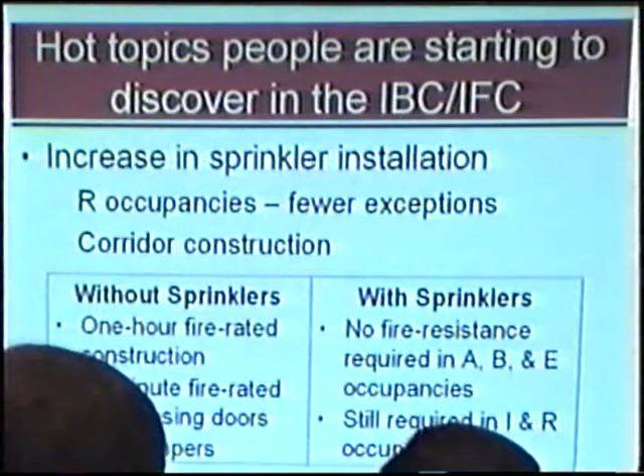So you're going to see many more buildings, say two-story office buildings, those plain mom-and-pop office buildings that would have never gone in with sprinklers before. This is another incentive to get those types of buildings sprinklered under the international codes.

You're going to see a lot of the thresholds reduced. I say proposed because these are proposed amendments. There's still a possible hearing, and things could change. But based on the best estimates right now, here are some of the new thresholds for sprinklering buildings under the I codes.

Occupant load in assembly occupancies greater than 300 people, you sprinkler the building. If that assembly occupancy is above or below grade, or the level of exit discharge, you sprinkler it. That's new. That's something good.

Factory and industrial buildings, we never really had sprinkler requirements for a lot of these. Many were sprinklered because of insurance or size. But now, if you have a factory or industrial building greater than 12,000 square feet, it's sprinklered, as will all institutional occupancies. Mercantile occupancies greater than 12,000 square feet, greater than 3 stories, or greater than 24,000 square feet cumulative on all floors, those are going to be required to be sprinklered.

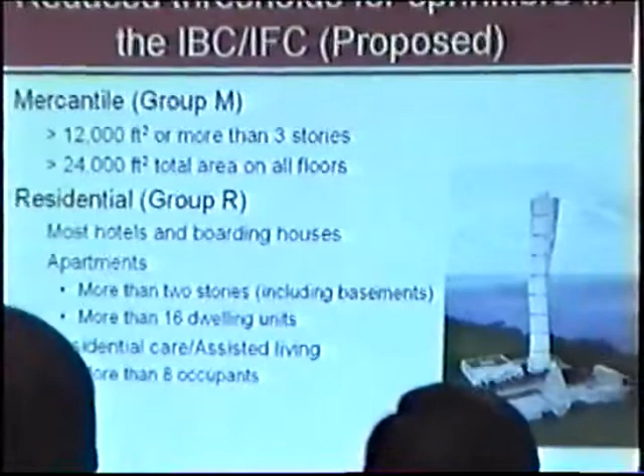Residential occupancies, most hotels, boarding houses, those dormitory-type occupancies, will be sprinklered. Apartments, the thresholds have been lowered and the wording changed. That's a big one: more than 2 stories, including basements.

Before, we had a lot of buildings that were 2 stories with a basement that were apartments. Those were never sprinklered. They will now be. That's a lot of what we build for apartments.

Residential assisted living type occupancies, where we have people with special needs, the threshold's been reduced to 8 occupants. Compare that, I mean, we're pushing these thresholds down more and more.

Compare that to a building I saw just starting construction in Sweden. This is a high-rise, 55-story residential tower, a wonderful building with $1 million apartments in it. In Sweden, you're allowed to build this type of building unsprinklered.

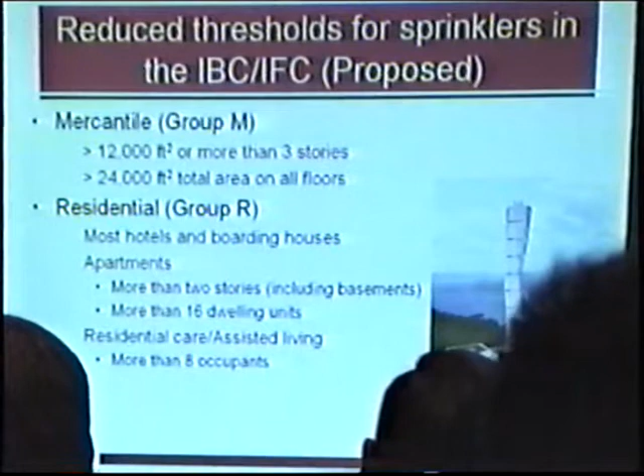And so what the designers did, they said, hey, wait a minute, we should probably still sprinkler this building. So they're going to sprinkler it, but what they did was tell the building official, we'll sprinkler this building, but we want to get rid of one of the 2 exits. So this building, halfway built already, will be sprinklered, but they used that as a trade-off to only have a single exit, single stairway in a 55-story building.

So reducing these thresholds down just improves the safety that much more. 12,000 square feet or more, or 24,000 square feet on all stories for storage occupancies, now you're going to sprinkler those.

Many more fire alarm systems are going to be required under the international codes. But there's a big exception: if you sprinkler the building, a number of those go away. Except in residential occupancies, you have to check the amendments. There's a lot of what-ifs.

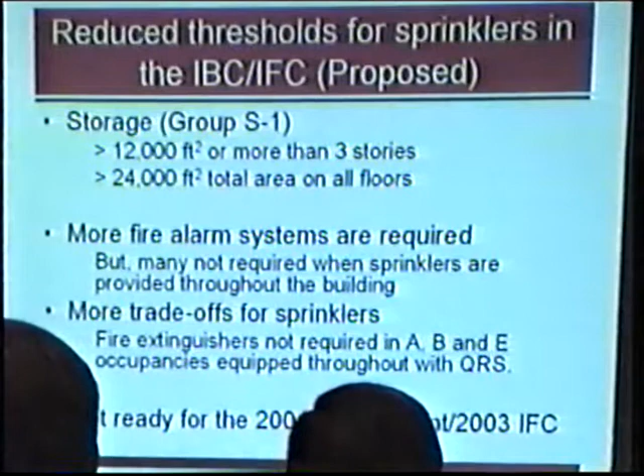But here's another incentive for sprinklering buildings, is that, gosh, I don't want to spend all that money for the alarm system at the same time. We'll use the sprinkler system as lots of heat detectors, and now we have our alarm system.

There's even more trade-offs. If you have an assembly, business, or educational occupancy, and there's quick response sprinklers in that facility, you no longer need fire extinguishers. Here's just another thing we can use to sell sprinklers.

Any of you trying to get ready to make some business decisions ought to start listening about the 2003 International Fire Code, which would be the next one we would adopt in the next cycle, or what is a supplement to that document.

Basically, all residential occupancies other than one and two family dwellings would require sprinklering under that document. So it's coming, it's coming very soon. We may modify it a little bit in Minnesota, but for those that hang plastic pipe, there's going to be a lot more business in a few years.

Here are the standards that we are proposing to adopt currently in Minnesota, and this is what leads us to tonight's presentation. Currently, we're proposing to adopt the 1999 edition of NFPA 13, the 99 edition of the other 13 standards, the 96 edition of 14, the 99 edition of the alarm code, and the 1998 edition of NFPA 25.

Wait a minute, Rich, we've never adopted NFPA 25 before in Minnesota. Well, under the international codes, the language will say you have to meet NFPA 25. Now some people are going, ooh, that scares me, or ooh, that's good. The way the language has been written is that you still only do the inspection once a year, but that inspection you do once a year is done according to NFPA 25.

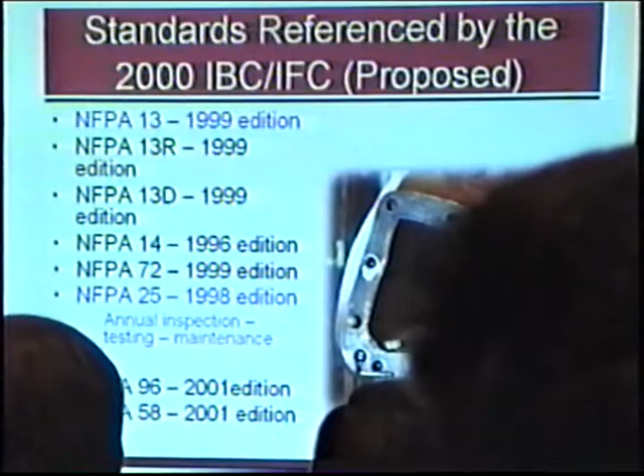Compare that to some of the other standards we're adopting. The propane folks were very vocal and came in and talked to a lot of the committees writing the codes. They have the latest edition that is being adopted. So if you feel that after tonight's presentation the 2002 edition of 13 or 72 or any other standard should be different, you still have a couple more days in which to make a comment.

And as we go along here, I have a lot of information. I want to try and give you a general introduction to the standard and cover a lot of things. But certainly, if you do have questions, we'll keep it as interactive as we certainly can.

So what are some of these amendments we are going to make that are going to impact NFPA 13, whether it's the 99 edition or the 2002 edition you're using? Obstructions: there's actually language now in the fire code that supersedes or is higher in authority than the installation standard, NFPA 13, that covers kiosks, booths, displays, things you'd have in a shopping mall. So if those are something you're going to have to design for, check the fire code. That's going to alter how you would cover it.

Limited area domestic systems — there's some language in the fire code. We've had this language before, but it was buried; now it is very clear in the code. If you have a building of undetermined use, and you're going to the building or fire official saying they don't know what they're going to do — whether they're going to make rocket motors in there or sell things or whatever — the minimum design for that is ordinary hazard, 2 over 3,000 square feet.

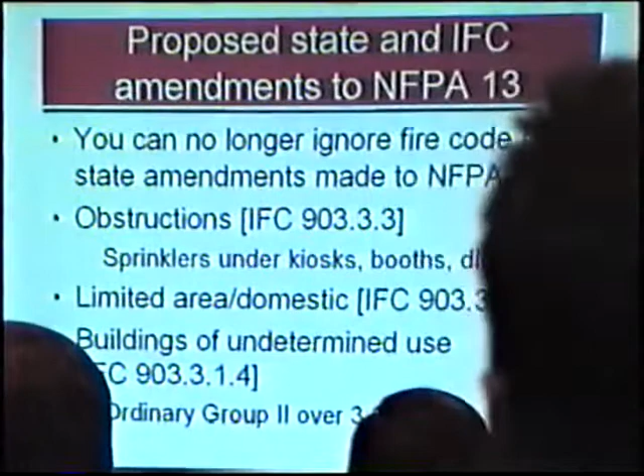Yes? How international is international? International means the United States, the continental United States. When you take this code outside the U.S. and show it to people, they say, so I'm supposed to build a hut in Africa with this, I'm supposed to design an all-concrete building in Europe with this? It's a U.S. code. They just got to the name 'international' first.

You would see some provisions in there start to possibly change — you may see this code adopted and they may change language, maybe also publish it in Spanish so that you could use it in another country in our hemisphere. Or Canada — they have their own rules. So it's international as long as you're in the U.S.

Good question. Well, that only creates a follow-up question: what about the international code coming out of Boston, which directly competes head-to-head with this? Oh yes, well that other international code has similar provisions. It's a family of codes developed by a different group — the different code writing groups were initially working together, and due to a number of reasons, everyone has their opinion, they went their own ways. They too have a code. In Minnesota, at least, the saying used by the enforcement community is the reason they call it NFPA 5000 is that's the year it will be adopted in Minnesota.

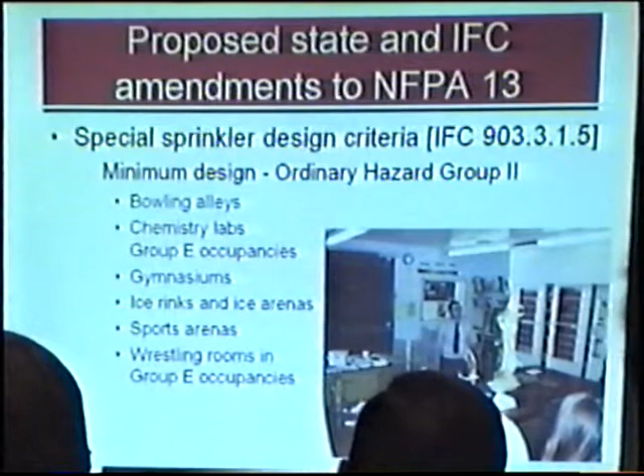There's special design criteria for sprinklers now in the fire code. If you have any one of these occupancies, in the past, a sports arena, a gym, or a wrestling room, or a chemistry lab, everyone would come up with different numbers. These were kind of the numbers the state fire marshal used as guidelines when doing plan reviews, and so those have been brought into the code.

Because the fire code is higher in authority than NFPA 13, when you hit upon one of these, it's a minimum ordinary hazard group 2. Wrestling mats, due to the foam mats, chemistry labs, due to things teachers do in the laboratory, so there's some minimum design you have to meet.

Hazardous materials: if you have hazardous materials you're designing for, and there's not a whole lot of guidance in 13 on those, it's ordinary hazard group 2 over 3,000. That's in our current code, but it was buried. It'll be a little clearer now.

Flammable and combustible liquids, we're doing something different. NFPA 30, the 1996 edition, is where you'll go to find your design guidance. There's data in Chapter 34 of the IFC that basically is more stringent or requires more than NFPA 30. So you have to check both documents when you have a flammable or combustible liquids job.

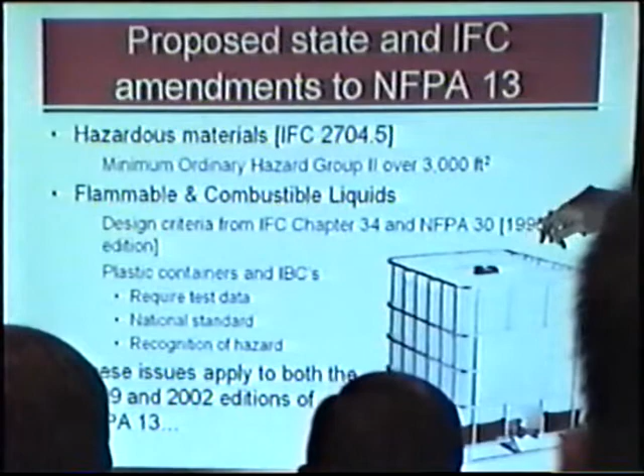Plastic containers, these big plastic containers called IBCs, or intermediate bulk containers, if they contain flammable or combustible liquids, there is no guidance in either of these two documents that we felt comfortable with. So there's specific language now that says when you have big plastic containers, you either have to have test data or go to a national standard, meaning maybe the 2002 edition of NFPA 30 or an FM standard. So that will just require you to go find a couple other books. That's kind of the background.

A lot of people think magically NFPA 13 is adopted, or they can buy this book, and that's what everyone should be using in the state. No, there's actually a much more formal process for making a given standard, whether it's the 1999 edition or the 2002 edition of 13, legal, the law, or what a fire or building official can enforce.

So any of you that attended that Minneapolis meeting in May of NFPA, or attended the voting, this edition of 13, 13R, 13D, they were all voted on here in Minneapolis and approved. After that, there were a lot of folks that didn't like how the voting went, as usual, and so there were quite a few appeals. That delayed this standard getting out a little bit, and it changed some things radically in the standard. So even if you followed that voting that day, or what had gone on up to that point, you may find a few things different in the current standard.

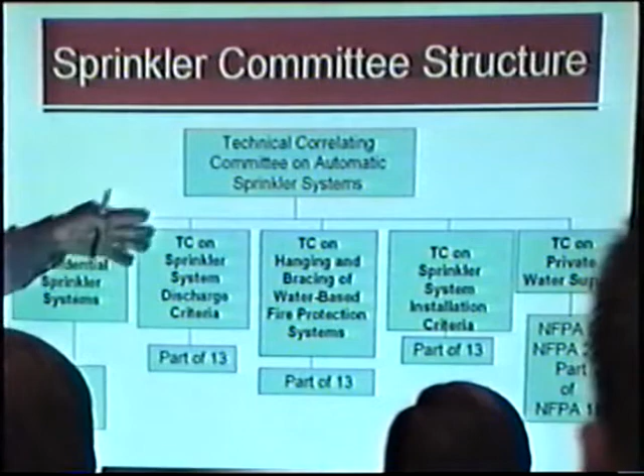Here are the folks that wrote this standard. They fall into one of five different groups. There's a task group that meets and writes all the residential provisions, so they do 13D and 13R. There's a group that handles all the discharge criteria, this is how much water you put on the fire, how you install sprinkler heads, minimum pressures, minimum densities, those types of things. That's the group I attend all their meetings. Hanging and bracing, that's the earthquake people.

Installation criteria, these folks, most of the changes you're going to see came from this installation criteria group. They're going to help you in a number of cases. There's going to be a few other cases where you're going to see that I'm not too happy about what they did. And private water supply, NFPA 24 and all that underground water main type of stuff came into the code last edition, so those folks have their own group that will meet.

So how much is new, Rich? I'm going to spend, how much on the new standard? $38.47 on a new copy of this standard.

What's new? Well, you're going to find most of these changes are housekeeping. There was a new manual of style. NFPA wants all of their standards to look the same and feel the same, so they're going to have a numbering format without the dash. Everything's renumbered so that if you look at the International Building Code or NFPA or any other documents, they're all going to use the same numbering sequence, which will make things a little bit easier.

All right, who likes the metric system? The people from outside the country like the metric system.

Oh, sorry. I prefer ergs and slugs and dynes and fathoms. No, we just missed having a metric standard.

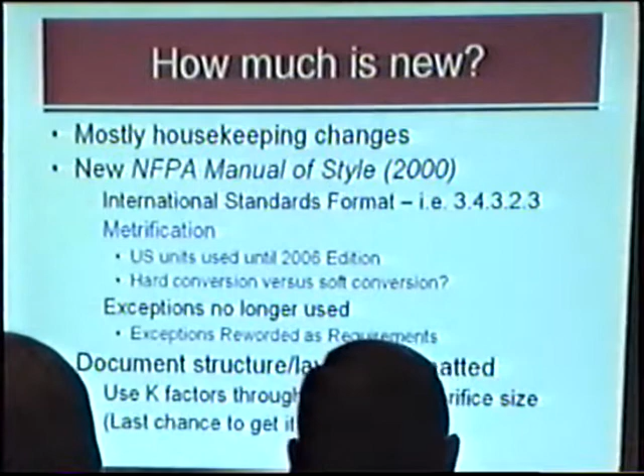Actually, there was a draft. The first draft that came out was in metric, and enough people said, can't do it, it's going to give me chest pain, that the committee was given until 2006, the next edition, to have it all in metric. Everything else we had to do, all the formatting, had to meet the manual style. But because so much in the fire protection systems area is English unit driven, and manufacturers weren't ready for it, we were given another 4 years. The 2006 edition will be in metric, so you'll have a 25.4 millimeter pipe, not a 1 inch pipe.

Okay? The problem is, how do we convert that stuff? Do we do it exact, so it's 25.4132 millimeter pipe for your 1 inch pipe? Or do we just say it's a 25 millimeter pipe and forget all the other stuff? That's a very difficult problem to figure out. But those of you that have kids in school, have them start teaching you the metric system. Just start thinking about it.

Why 2006? That's the next edition of the standard coming out, and the committee was given one edition of the standard to let everyone know it was going to be in metric, to get ready for it, and to let manufacturers know their data sheets should start reflecting metric.

What's the true benefit? There's actually stuff happening outside the fire protection community that is driving us to metric, for international standards. For example, for the U.S. to compete against Canadian pipe manufacturers or Korean pipe manufacturers, or for us to participate in international standards development, our standards have to be in metric. So there are forces outside of NFPA, outside of the building segment, driving a lot of this. It's international commerce. I want to be able to sell my same sprinkler head here and in the UK. Why do I have to manufacture two separate ones?

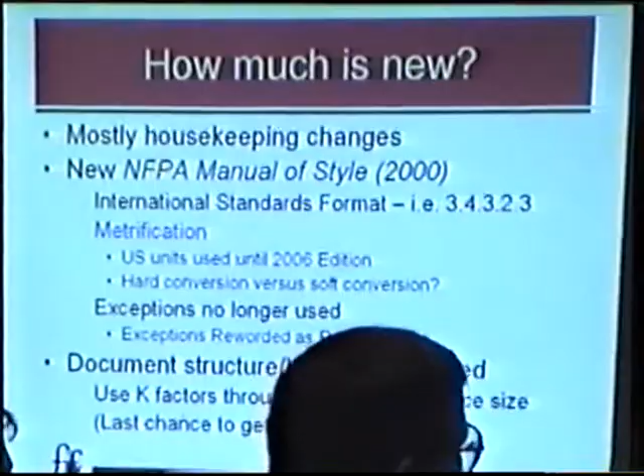It'll still be the same heads, the same listings. You won't go back and redo all of your testing. You won't have to get new dies to cut different pipe, but we're going to start calling things differently.

What about the water? Yeah, the water will know it's now under the metric system. So water will flow in liters, not gallons per minute. So it knows. We've already talked to the water.

There are no longer exceptions. Reading the code, it's going to be much more important not just to read the section you're going to, but to read the sections after it. No longer will it say sprinkler the whole building except non-combustible concealed spaces, except basements or something like that. It's going to say sprinkler all buildings. The next code section will say you do not need to sprinkler the following, so there are no more exceptions, it's all code language. That's been carried over into paragraphs after it, so some of these code sections that had 10 or 11 exceptions now are a paragraph with 10 or 11 paragraphs following it.

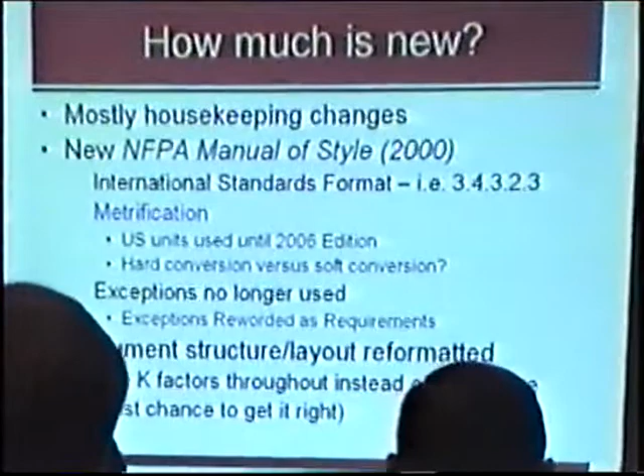The layout has been reformatted. There's no more 1/2 inch or 3/4 inch sprinkler heads, it's all by K-factor, because there was enough confusion with K-factors. This is really kind of, how many editions have they been messing around with the format of the code? There's a lot of people that say, alright, committee, this is your last chance. You really need to get this document in a format where it's going to stay that way for a number of years.

Technical changes, yeah, there's some technical changes. One of the things was because of the major reformatting change of the code, a lot of technical issues are going to be held to the next edition. So you'll see a few things I'll point out. Some things are different with ceilings, SFR sprinklers, solid shelves. A few of you are going to get clobbered.

Some TIAs, and there's a lot more design criteria, so a lot more options for how you can protect buildings.

Many more chapters now. The content has been divided up into smaller chapters. Instead of these huge chapters that covered soup to nuts, each topic now has its own chapter, which will make things a little bit easier.

There's mandatory references now separated out into their own chapter. Classification of commodities is its own chapter. System components and hardware, that's the same as the chapters you've been used to in the past. Hanging and bracing, underground piping, that material was scattered throughout the 1999 edition - that's all in its own chapter now.

Design approaches - this is area density curves - that's all in its own chapter, as is storage. There's all those extracts, all that weird design criteria for cooling towers, or that weird type of oxidizer storage. That's in its own area. All these water supplies, hose streams, that's all in its own chapter.

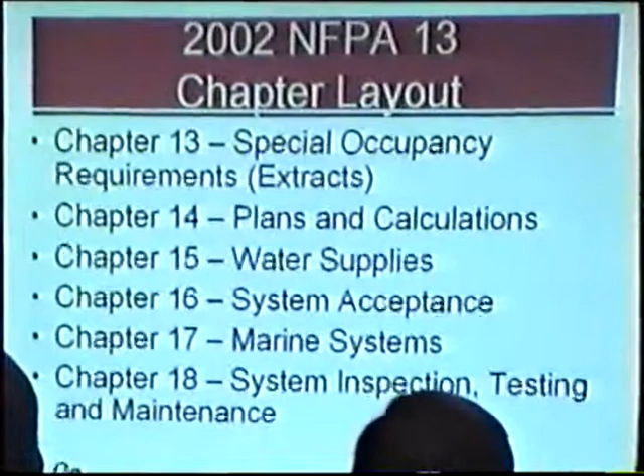There are no longer appendix chapters. Appendix is a body organ - we're international, it's annex. So everything now is Annex A, Annex B, Annex C. Annex A is the same thing you're used to with Appendix A.

That's stuff that normally sometimes you can get away with, but fire and building officials sometimes enforce anyway. It's the fuzzy stuff. There's a lot of miscellaneous good information that's been assembled in Appendix B.

Test data - there's now 20, 30 pages of test data for rack storage in Appendix C. That will help you if you have a discussion with a code official, for example, about flue spaces. You can actually go back and read the test data that led to that code requirement, which will help in interpreting. Not all of the data from the test makes it into the code language, so there's still some questions.

Non-mandatory references down in Annex E. Chapter 1, that's the same as we've been used to. Some things on retroactivity, equivalency - so if you have a new design or a new storage configuration that you have special test data for, all that language is basically the same.

The reference standards in 13, telling you how to manufacture pipe, how to do your welding, those are all basically the same, just updated to the new editions of each of those. Those were just number changes. There's a big question: if you have an issue with any of those reference standards in 13, those welding standards, the pipe manufacturer standards, you need to talk to the code official sooner as opposed to later.

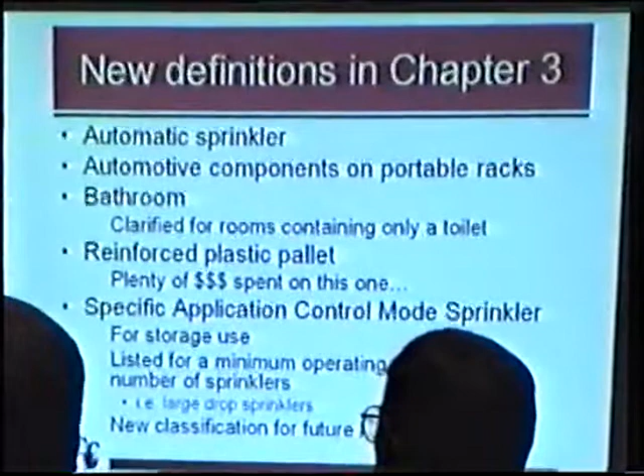Bathroom is defined now to include a room with only a toilet, so thank you. Reinforced plastic pallets - a ton of money was spent on this issue with fire testing, so we're going to have some things we're going to have to do. If you have anyone you work with that has plastic pallets, there's some changes that will help and some changes that may hurt depending on what you're doing.

We have a new type of sprinkler coming out. We have a few examples of it already, and so there's new classifications. That's called a specific application control mode sprinkler.

So it's control mode, not ESFR, not suppression based, meaning we're still going to open up a lot of heads around what's burning and keep it from spreading. But it's specific application in that it works for a single commodity, the design is real specific, and the manufacturer or listing tells me to design this for 16 heads at 27 PSI.

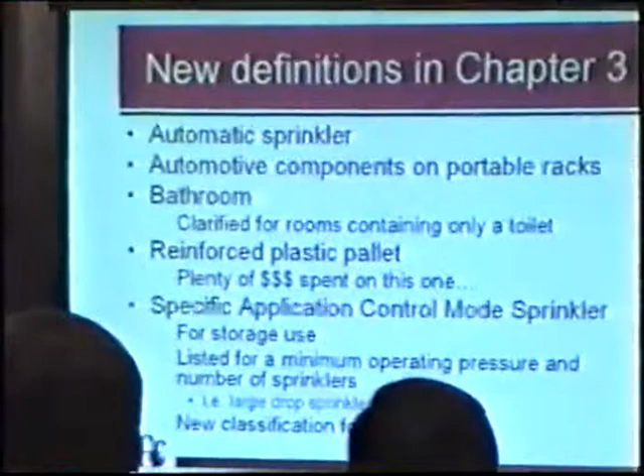So it's not area density, it's not 0.6 over 2,000, but it's real specific to the commodity. For example, there's specific application control mode sprinkler data for protection of plastic pallets that tells you to use this specific head with this specific K factor at a specific pressure, designed for X number of heads, not X number of square feet.

Finally, we've clarified all of these definitions for ceilings. I mean, how long did we have to wait for this? Flat?

Horizontal, flat just means flat can be any one of these, right? Horizontal is this room, all right? Slope not exceeding 2 in 12. So we can have a little bit to get the water off the roof and still have it called flat, meaning we can use our extended coverage heads under that. That helps out a little bit.

Slope, greater than 2 in 12. Okay, good, I can live with that.

Smooth. This was a problem with extended coverage heads. What was smooth and where can I use them? People would sometimes get them installed in a space and somebody would come in and say, well, that's no longer smooth, so you can't use extended coverage heads in that space. That's what they're listed for. So it's free from significant irregularities - that has really clarified it, that 'not significant.'

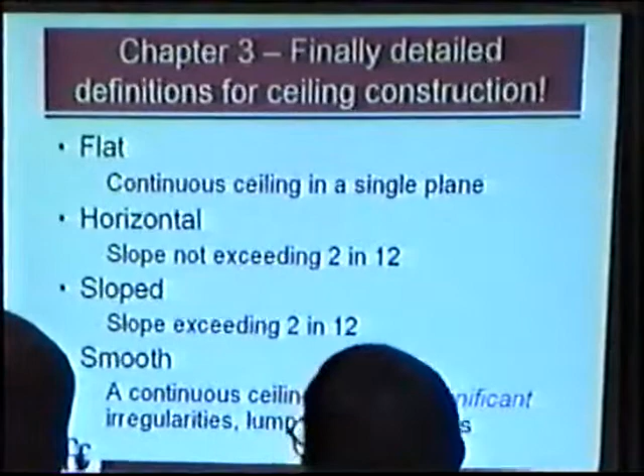You'll see in a minute that it will be a lot easier for these weird ceilings.

And my personal favorite, concrete T construction. We now have a definition for concrete T construction, and it's obstructed construction. We would normally think that big legs hanging down like this would be obstructed, not smooth, and so that's good.

If you have a building with bar joists, and after you hang your sprinkler piping, somebody comes in and sprays lots of fireproofing on that, such that 30% of the cross section is blocked, now you have obstructed construction. You may have to move heads. You need to find out in advance if there's going to be spray-on fireproofing in that building.

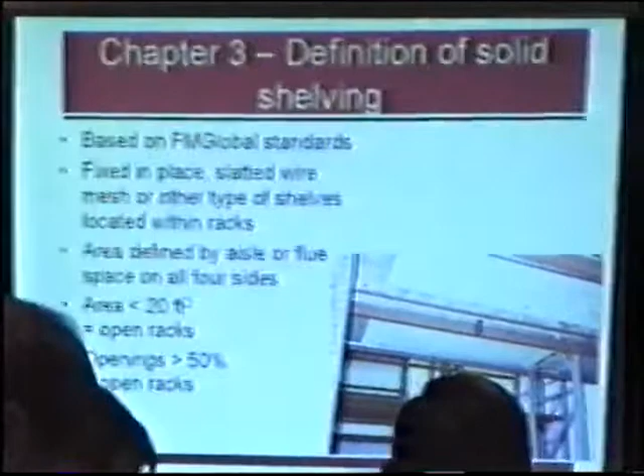Solid shelves. If you're used to the FM Global standards, that's what we've brought into the code, basically. If you have slatted, wire mesh, or other types of things in the rack, defined by an aisle or a flue space on all four sides. So if you have no longitudinal flue space, the area of that solid shelf is the entire depth of your double row rack, for example.

If it's an area less than 20 square feet in the solid obstruction, that's still an open rack with flue spaces on all four sides. And if your openings are greater than 50%.

Let's see, Chapter 4, General Requirements. This is a pretty short chapter, nothing new. Level of protection, you still sprinkler all areas.

The one thing is an owner's certificate. Those of you that submit plans to the State Fire Marshal's office a couple years ago noticed there was a new plan review information form that required you to supply lots of information about the system - the storage height, where the water's coming from, are you creating the water using the swimming pool, all that type of thing - and give that for the plan reviewers.

Well, for the installers, there's now an information sheet for you. It's called the owner's certificate, and it's a two-page document in the standard. You could add more to it. They give some guidance for what it should be.

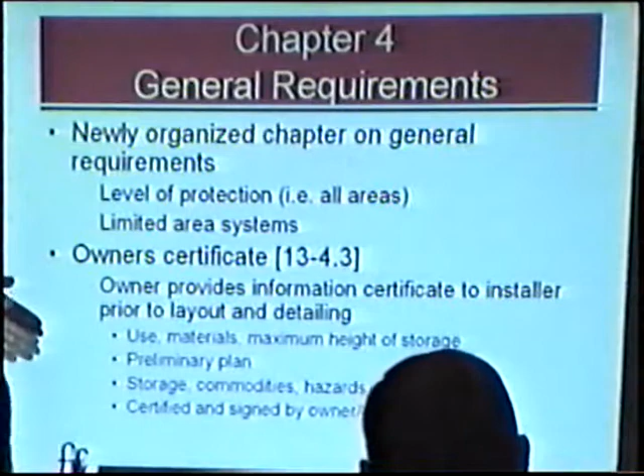If you're filling out the form for the fire marshal's office, I think you should probably have most of it in there. But the owner needs to tell you about what they're doing, how they're storing it, a preliminary plan, rack layout, storage, commodities, and hazard, and it has to be certified and signed by the owner or the agent.

Yeah, I'm hearing, yeah, right.

I think it even says water supply in there, so good luck on that.

Commodity classification. There's one new commodity classification for wax, candles, and blocks of wax, being Group A plastics. That's the only really new thing I think to the table. Oh, and those fireplace logs that come in a little package that you can put in - I think there's a classification there for now.

Language that clarifies when we have mixed storage. If you have mixed commodities, if you're storing plywood and metal pump parts, you protect to the highest hazard, the plywood. But you're allowed to have up to 10 pallet loads of a higher hazard commodity mixed in, well mixed, so that none of them are touching. They're randomly dispersed. So in your entire warehouse with rack storage, you can design it to a Class 1 commodity and then have just a few pallet loads of Class 3 commodity for their boxes or something like that in the building and not have to design it for that higher hazard commodity.

You're limited to 5 pallet loads if you're just sprinklering to Class 1 and 2 and your higher hazard is a Class 4 or plastic. So this means you can basically have a few pallet loads and not get clobbered for the whole building. At the same time, this is telling you, no, you can't have 5% or 10% of the building be higher hazard. This means a couple pallet loads in the entire warehouse. Any more than that, and you pick the higher hazard.

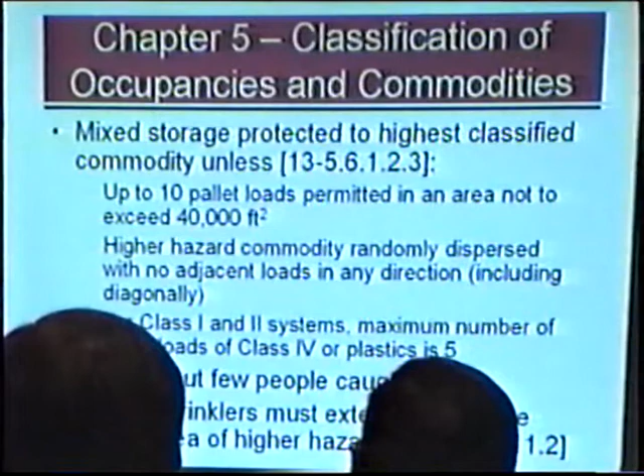In-rack sprinklers, this was an amendment, thank you. After dealing with lots of big box stores, I got frustrated having a sprinkler head over that one section of rack with the higher hazard, nothing the rest of the way down the rack. Now the in-rack sprinklers have to extend beyond the higher hazard. So if they say, I just have one section of rack right here where I'm going to have my nasties, you can't just put one sprinkler head over it. You have to continue down the rack. You don't have to go over the aisle, but at least down the rack, so that the fire generated by that higher hazard commodity cannot drive the fire in the lower hazard commodities on either side and make it worse.

Plastic pallets, here's the big deal stuff. If you deal with plastic pallets, this is going to change how you work. Wood and metal pallets, nothing's changed there. That's already assumed in the classification of the commodity. When we test a Class 1, a Class 4 commodity, whatever it is, we do it on wood pallets. Therefore, if you use wood pallets, you're fine.

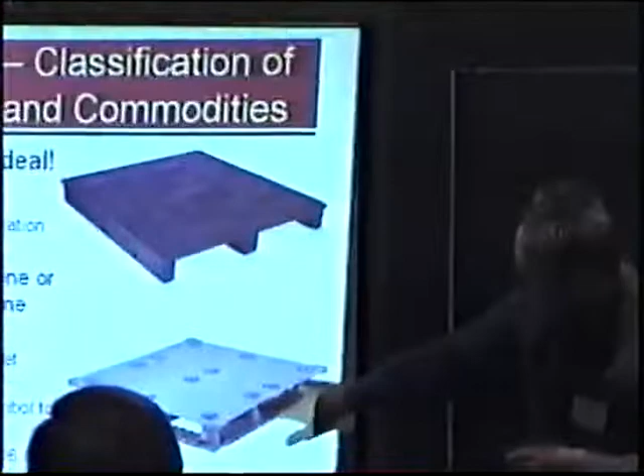If you have reinforced polypropylene or high-density polyethylene, very easy to tell, right? That's a 2-class increase. So if you put metal pump parts on this type of pallet, you're actually designing for a Class 3 commodity. The problem is these reinforced pallets that have metal reinforcement in them hold together longer, and so they allow that plastic material to burn longer. They don't allow the commodity to fall out of the rack onto the floor and out of the fire, lowering the hazard. It was found by a lot of testing, and I'll show you some of that testing in just a second, that this is a much higher hazard than we had thought - a two-level increase.

There's supposed to be something marked on the pallet saying it's reinforced. I don't know what the symbol is, I haven't seen one yet. But, oh, wait a minute.

Somebody else said, aha, but I have special test data for plastic pallets that if you use a K17 sprinkler head, it's only a 1-class increase. So this is the first time, and there's going to be probably a dozen slides, where now things are a function of K factor. Things that we normally look at as an enforcement issue, what type of pallet you're using, now are a function of the K factor of the sprinkler head. Somebody had great test data that because that head performed very well, gave large enough drops, they were able to control the fire. So if you do use a K17 sprinkler, it's only a 1-class increase.

If you have non-reinforced polypropylene or high-density polyethylene, it's a 1-class increase. That's kind of the normal plastic pallet we may see. If you have something else and you don't know what it is, the standard says you have to go test that in the laboratory or protect it as two classes.

If you have a specially listed pallet according to UL 2335, and they now have a special test standard, then that's the same as wood. Even though it's made out of plastic, it's a wood pallet. There's no change in the commodity classification.

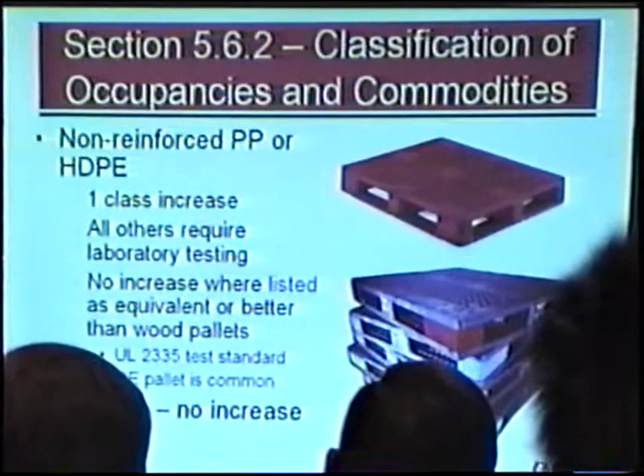The most common you're going to see is GE. They're the ones that spent all the money to do all this testing and get this code change in the standard. Here's one example of their fire-rated, warehouse-friendly pallet. But you will see it listed as meeting a UL standard. That's a wood pallet then for the design.

Is this tough? If you have a Group A plastic, you're already protecting the plastic, so go ahead, use a plastic pallet. Doesn't matter. Ralph Peterson's favorite section is the sprinkler identification code.

Now it's just formalized in the standard. Before the 99 edition, it was a section that said, by January 1st of 2001, you'll have these numbers on the sprinkler code. Now it's in the code as base code language.

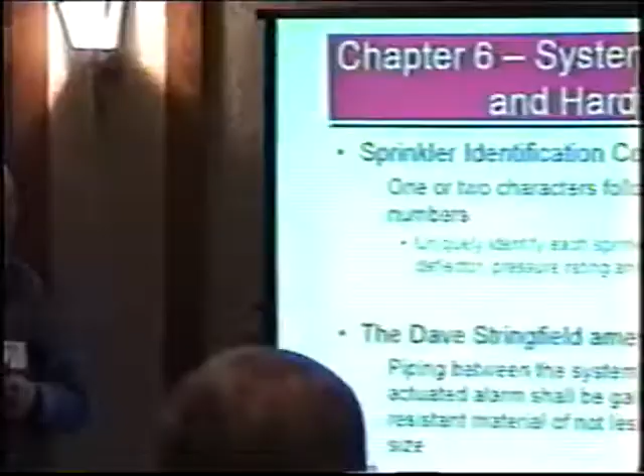Too bad Dave Stringfield is not here. He submitted an amendment. He's on the 72 committee. This language used to be buried in 72, but it's a sprinkler installation issue, so he got it moved over to 13. When you have a system and a pressure-actuated alarm on a sprinkler system, you need to use some corrosion-resistant pipe of a minimum dimension of 3/8 inch. So that was just something that used to be in 72. A sprinkler installer would have never known about it. Now we should at least know it.

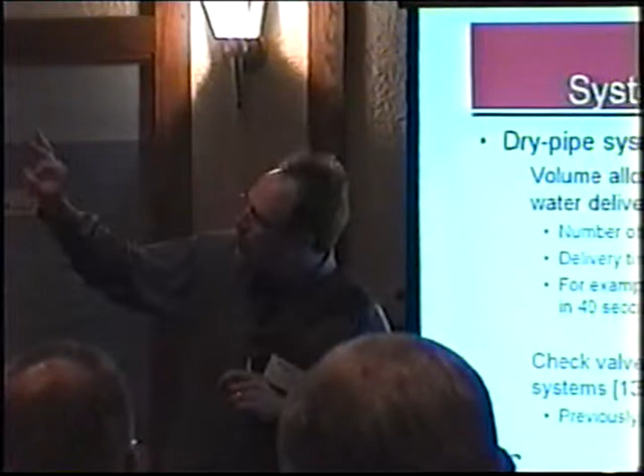So if I use this listed program for a high-piled storage freezer with high-piled storage in it, I assume 4 sprinklers are open because that's how much air we want to let out. We don't want to say all the sprinklers are open because that'll let the air out too quick and that'll cheat. So we said, you can open 4 and you have to have water out in 40 seconds. So if you can calculate it that way, then you don't have to prove it the old-fashioned way by opening it up and sitting there with your stopwatch.

Okay? Some of you will remember in the 84 edition, there used to be a statement in there that said, you can divide a dry pipe system up with check valves. If you have a problem meeting the time, or it's a tree, a double tree or something, put a check valve in either one, help yourself out meeting the 60-second time to get water out in a dry pipe system.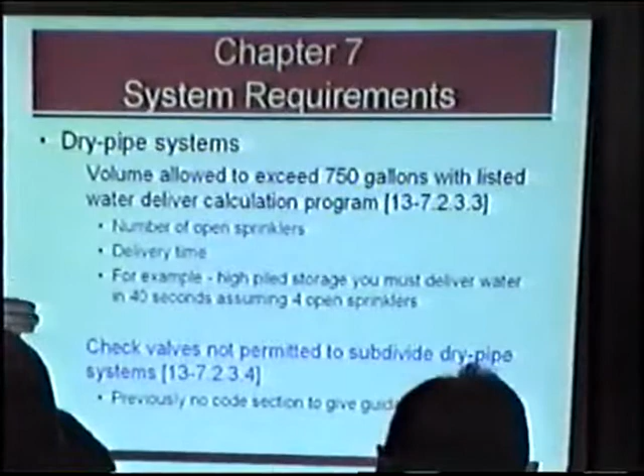I don't know how this one got in. I mean, I don't think there were a lot of people coming in saying these check valves are freezing or they're corroding, therefore the dry systems are not working, but it's just a general feel that, as these systems get larger, as we allow extended coverage heads, people are storing higher, that with dry pipe systems, the installation committee no longer felt that this was appropriate. So, under the 2002 edition, you're not allowed to use check valves to subdivide a dry pipe system.

In the 99, the 96, there was no guidance. It didn't tell you either way. So everyone basically said, aha, it doesn't say I cannot do it, therefore I can. And so this was just to clarify.

Antifreeze systems, if you want to use antifreeze in an ESFR sprinkler system, it has to be specially listed. What they found is, hey, a lot of these antifreeze systems are flammable. The actual liquid is flammable. So if I dump that out of the sprinkler system, if it's a control mode system, it doesn't make a whole lot of difference. But if I'm trying to control the fire and suppress it, the heat release rate or the energy given off by that antifreeze was just enough that I could no longer control the fire with a couple sprinkler heads, and so we no longer had early suppression, therefore the ESFR systems failed. So you have to use some special antifreeze.

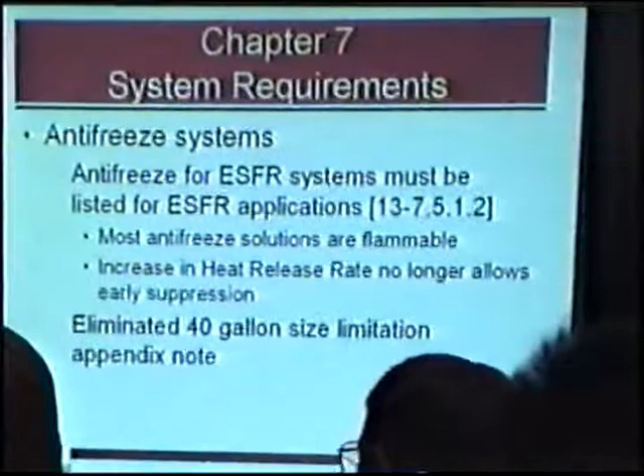There used to be an appendix section note that said, gosh, you really shouldn't use an antifreeze system greater than 40 gallons. Some people tried to enforce that.

There's really no logic behind it other than cost or size of system, so that was removed. Normally, we hope that upright sprinklers are installed with the frame arms parallel to the pipe. There's now a section—some folks came out with heads that, for some reason, need to be installed with the frame arms not parallel to the pipe. If they're listed that way, you can install them however you want.

There's a certain sprinkler head that needs that amendment in the code in order to work, because in certain cases it tells you to orient the sprinkler a certain way on the pipe. If you have an area that requires quick response sprinklers, but you have a high temperature next to a heater or something, you can actually use standard response sprinklers—for example, in a light hazard occupancy—where there's another reason why you'd have to use a high temp rating instead of ordinary temperature.

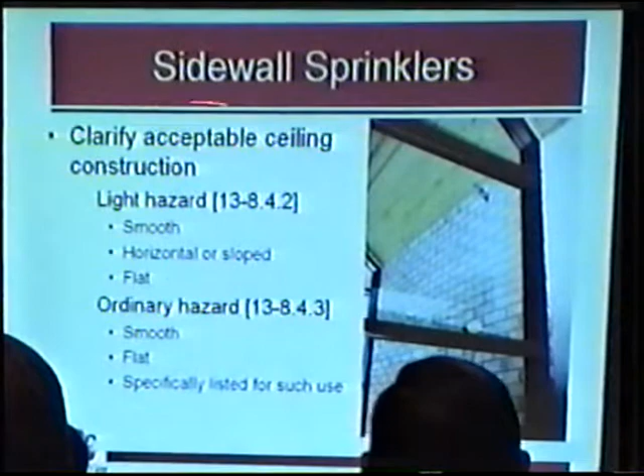There's a lot more in the standard on residential sprinklers. Things from 13R and 13D have been carried over into the standard, like separation distances—how far apart you should keep things, distance to heat. I regret to inform some people that you cannot install a sidewall sprinkler head at the bottom of a slope and have it spray up. The heat goes to the top and comes back down, and it's too late.

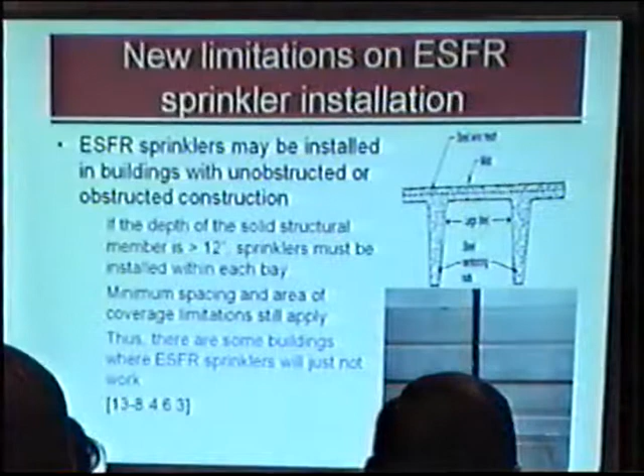Skylights. We have a policy in Minnesota we've been using, put together, that's worked pretty well—the State Fire Marshal policy on skylights and similar ceiling pockets. Now that's all in the code, so that will help us. Some of those policies maybe can go away.

Your 4x8 skylight—you're allowed to have it, and it doesn't exist for the purposes of the standard, as long as you've got 10 feet to another one. It's not there.

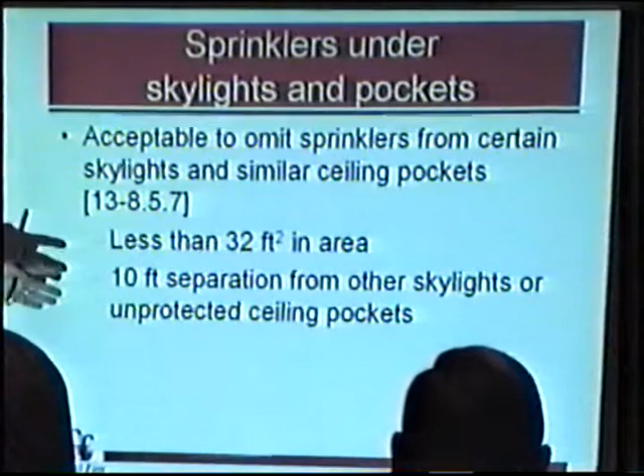If you have heads underneath a smooth ceiling, the language has been changed a little bit—that head has to be between 1 and 12 inches below the ceiling throughout the area of coverage of the sprinkler, meaning throughout that whole area you have to be between 1 and 12 inches of the ceiling, which is a problem with stepped ceilings like we see in a lot of tenant fit-outs for shopping malls.

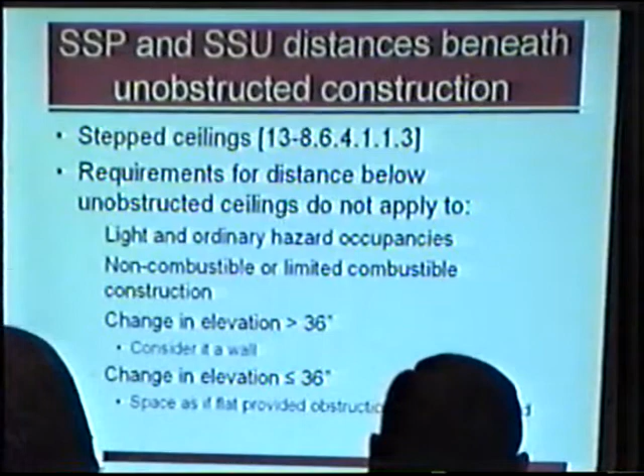So there's new guidance on stepped ceilings, meaning we don't meet that requirement of being within 1 and 12 inches of the ceiling, if the following apply: light and ordinary hazard, non-combustible or limited combustible like this ceiling. Limited combustible has been defined much better now, so there may be some materials that before you were calling combustible, but now we can call limited combustible. If the change is greater than 36 inches in my step, it's a wall—sprinkler on either side of it as if it was a wall. If it's less than 36 inches, it doesn't exist.

So here's what we're saying: if we have a step ceiling less than 36 inches, and you have at least a sprinkler at the higher location, not just at the lower location, that wall or that step does not exist—just go ahead, go on your way. If it's greater than 36 inches, treat it as a wall. Now you have that maximum half-S distance away from the step on either side of the step.

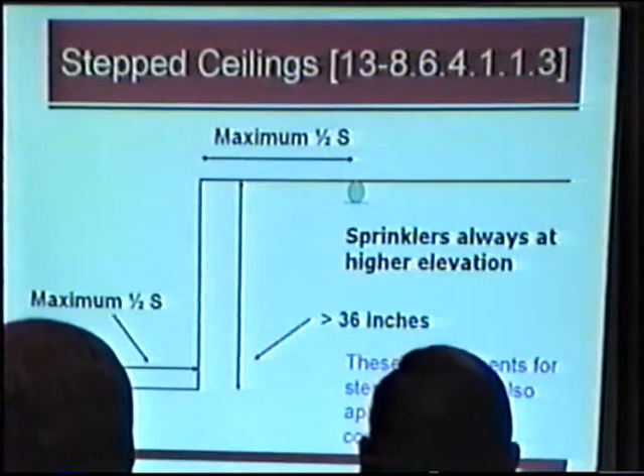Oh, hey, I get to use this with extended coverage heads too, which is nice. Before, everyone's getting clobbered—you'd have little things like this and somebody'd say, no, you can't use an extended coverage head. The rules for extended coverage heads are going to be much easier now. What the installation committee gave you with this step ceiling and some of the other stuff, they have taken away.

We're used to this, combustible protection area and maximum area per coverage, how far apart heads can be. If we had combustible obstructed construction with members greater than 3 feet apart, 168 square feet, that's nothing new. If it's combustible obstructed construction less than 3 feet on center, now you're limited to 130 square feet, still a maximum spacing of 15. Get ready, get ready, get ready. Oh my gosh, you're going to kill me with attics.

If you have an attic with a slope greater than 4 and 12 and spacing of members less than 3 feet, which is most attics, you're limited to 120 square feet. You are now limited to a maximum spacing depending on the pressure you're willing to give up at the head. If you can give up 20 psi at the head, you can go 10 by 12. At 7 psi, you're limited to 8 by 15, and that smaller dimension is perpendicular to the slope, so that we have heads spaced close enough apart along the slope that as that heat comes up, it's able to catch one of these heads.

This was based on attic sprinkler testing. I think in your handout I wrote CC1 sprinkler testing. The attic sprinkler testing, the Central folks burned all types of attics, and they showed that standard sprinkler layouts don't work in certain configurations. The heads are too far apart along that slope. You don't catch it, you burn the attic off.

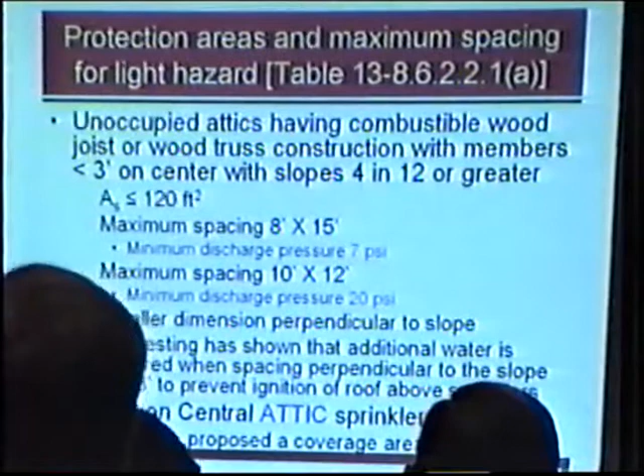The original proposal also recommended a maximum spacing of 64 square feet. Can you imagine what it would have taken to sprinkler most of these attics? So this is the actual language that was brought in. The test data was reviewed again, and so we were at 120 square feet. That has some real implications in attic sprinkler design.

At the same time, for these same type of attics, these peak attics with slopes of 4 and 12 or greater, we have to change our layouts that we've been using. We're already doing QRS sprinklers, it's light hazard, we've put quick response sprinklers in there, that's nothing new. You now have to have a row of sprinklers within 12 inches of the peak. No more going down 3 feet, no more sending it over 3 feet or moving it way over. Within a foot, either way of the peak, you have to have some sprinklers.

And that set of sprinklers out on the eave, way out on the edge, has to be a maximum of 6 feet out. You cannot keep them way down there because they're covering too much area where the heat will never get to them. And so that's a real issue. You can use some smaller K-factor sprinklers if you wish at that 20 psi in order to reduce your flow, but now you have to use some corrosion-resistant piping. So there's games you're going to have to play with the pressure.

So here's what we have for attics and roofs. If the slope is greater than 4 and 12, the structural members are less than 3 feet on center, you have to have a row of heads within 12 inches either way of the peak. The last row of heads out here on the eave, maximum of 6 feet, and some minimum pressures based on how far you're spacing. If you're spacing out 8 feet this way, you can go 7 PSI. If you want to push it to 10 feet apart, you have to go to 20 PSI and be able to provide that pressure.

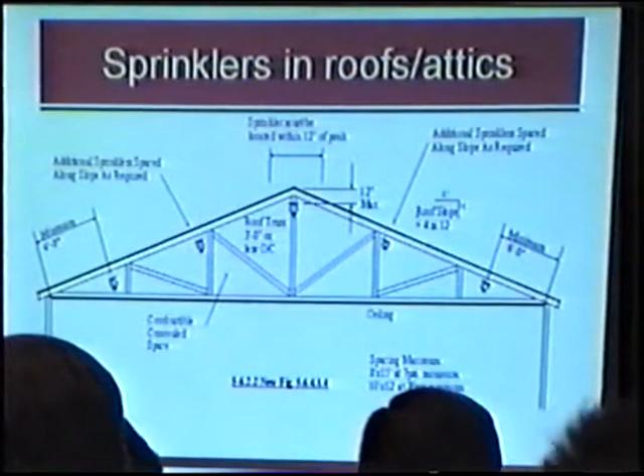Basically, this wider spacing was the 0.2 density that the proposal originally looked at for sprinklering.

Say, Rich. Yes? On that attic, down the eave now, they have to be a maximum 6 feet out. Is there any consideration then of how high above the bottom of that attic truss you have to be able to develop the spray pattern? No, nothing's changing that. That is the change to the guidance. And anything like that, distances to trusses, all that would be the same, no guidance still, unfortunately.

There's some other things. The installation committee was busy working on the obstruction requirements, which, I mean, in any design, you almost spend more time on the obstruction requirements than you do anywhere else.

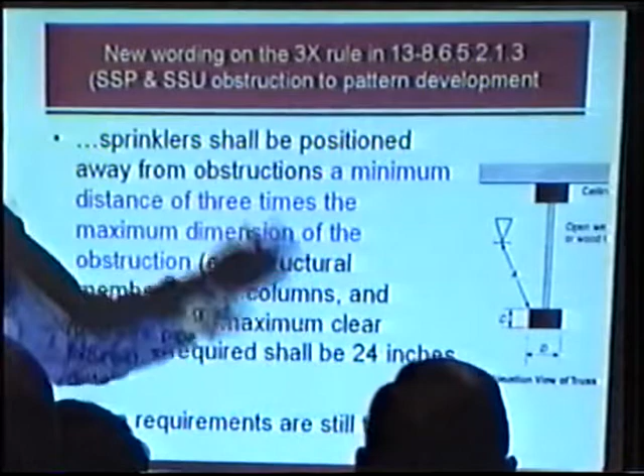So they've clarified some things. The 3 times rule, or 4 times rule - whoever wrote that language should never be allowed to write code language again. This is the rule that said you have to be 3 times away the maximum dimension of the obstruction, not to exceed 24 inches. Well, what is the not to exceed 24 inches? Is that the distance away, is that the obstruction? Are you 3 times away the 24 inches? It was never clear. So that's been rewritten to say a minimum distance of 3 times the maximum dimension of the obstruction. The maximum distance you have to be away is 24 inches - separate sentence. They took all that out and divided it up.

There were more interpretations on that. The end result is the same - the distance away, the intent, all the basic requirements are the same. It's just been worded differently to help you out in interpreting that, because we're spending way too much time on it.

Ceiling pockets - these are bigger than your skylights. These could be long skylights that run the length of a building, something like that. But when you have pockets created in the ceiling, all ceiling pockets must be protected. But then there's a code section that says unsprinklered ceiling pockets are permitted. This is that language where we're no longer using exceptions, where the language is going to be different. So you have to read the next code section after it - this would be .1, this would be .2.

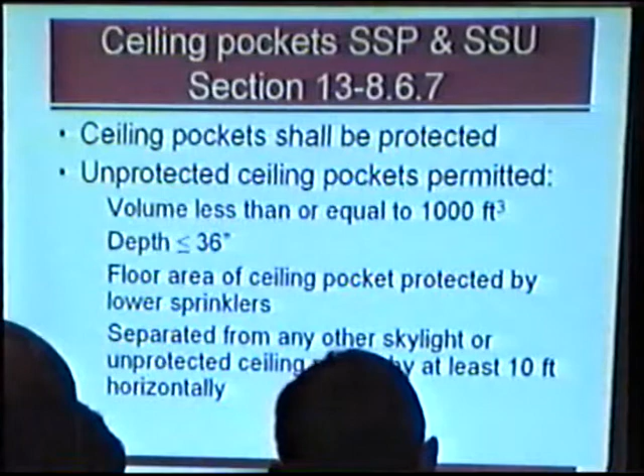If your volume is less than 1,000 cubic feet, depth is less than 36 inches, the floor area is covered by sprinklers down in the lower part of the ceiling, and you keep these pockets 10 feet apart, with limited or non-combustible construction and QR sprinklers, you're allowed to just treat that pocket as if it doesn't exist. It's got a cover on it.

And that will make it much easier, especially with extended coverage heads, protecting under those ceiling pockets. You still have to have floor coverage, so that doesn't mean you could have a 50-foot by 50-foot pocket and cover it with sprinklers around the perimeter. If you've got 10-foot coverage, you're limited to certain sizes so that you still have complete floor coverage the whole way around. Basically, here's what you have: less than 36 inches, it doesn't exist as long as your floor coverage is complete down below.

Those of you that are AFSA members, some of your funding went to pay for these pretty pictures that were done. This was a code change based on computer modeling. And they actually showed with the computer modeling you could do a lot bigger pockets - in other words, continuous pockets the whole way down the building, and much deeper pockets. But the installation committee did not feel comfortable enough accepting this based on computer modeling only, so they picked a committee number: 1,000 cubic feet and 36 inches depth.

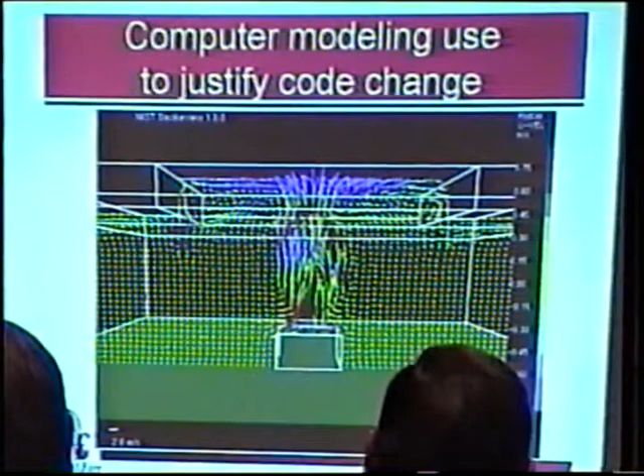Those numbers were actually shown by modeling - when it's not very deep, the hot gases tend to spread out and will activate my sprinklers there. But if I make it much deeper, those gases kind of spin around in there and don't make it out to my ceiling sprinkler underneath.

Sidewall sprinklers. If you're, for example, looking in a mall or arcade area outside an office in St. Paul, on Cedar Street, you may notice that you have sidewall sprinklers located to protect areas where they're not at the peak.

We've clarified things. If the slope is greater than 2 in 12, you have to install at the high point, positioned to discharge downward, and it applies to extended coverage heads. So if I have a peak like this, is it okay to put the sprinkler head aiming this way? No, because that's not discharging down the slope. The only acceptable position under a slope ceiling is putting the head at the top and aiming it down. You cannot cover areas like this - if you've got a big open dome, you can't put the heads down around the bottom of the dome and hope they're going to go off someday, because they won't.

This is going to save a lot of people that do storage occupancies and use extended coverage heads a ton of money. If you have extended coverage heads in high pile or extra hazard, before we were ending up having to go with the listing and use a 12 by 12 or a 14 by 14 spacing for the water flow rate, even if we were not spacing them at that distance. Now, you are able to use the actual coverage area.

This is what FM Global has been doing. Under the '99 code, if you're using a 14 by 14 extended coverage head but only in a 14 by 8 rectangular area at a 0.6 density, you had to use 118 gallons per minute. Under the new code, same head, same layout, everything, you can design it for 14 by 8 and only need 68 gallons per minute.

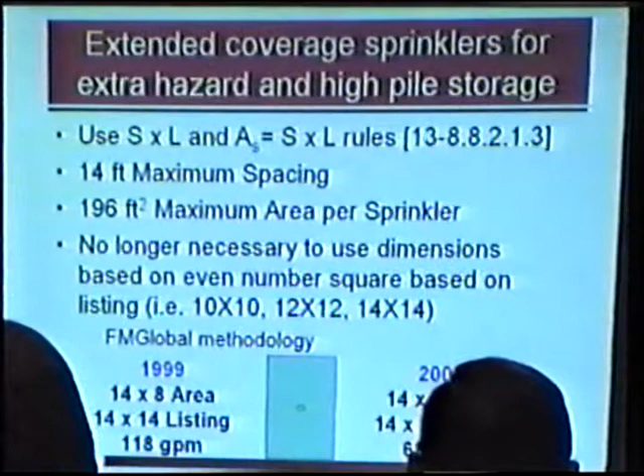They should hopefully start changing it. So there's one though - if you're going to use that in the near future, make sure you clarify with the code official that everyone's okay with using that different flow rate. It's a lot less water, but at the same time it could lead you astray.

New section on obstructions for residential sprinklers. When we had residential sprinklers installed according to NFPA 13, for example in a high-rise building, we didn't know how you handle obstructions. Now there's a specific section. There's one section where there's an error in the numbering, so take your notes home and change that in your copy, so you're not sent to the wrong section.

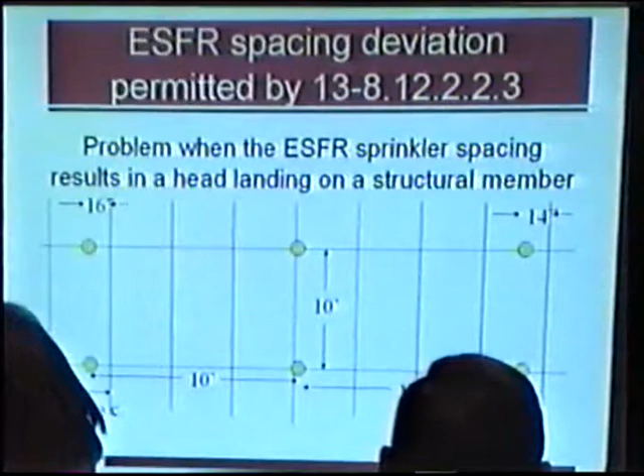If you have ESFR sprinklers and some obstructions, some structural members you're trying to miss, and it doesn't matter how you move them at the required spacing, you're always going to hit one of these obstructions - you're now able to fudge the ESFR spacing a little bit. So even though it's 10 by 10 ESFR spacing, you can go 11 foot on one side in order to miss a structural member.

There's some quirks with this rule. I'm simplifying it greatly - if you're going to use it, you've got to check on it. For lower storage heights and ceiling heights, we can go 12 foot on ESFR heads; higher ceilings, 10 feet. Distance below the ceiling is now a function of K factor. Much more in this code, and much more in the 2006, is going to be a function of K factor.

We tested it this one specific way, okay, you can get away 3 to 5. We tested this other head this way, okay, it has to be 3 to 12 inches under the ceiling for the different heads. Oh hey, this is a great one.

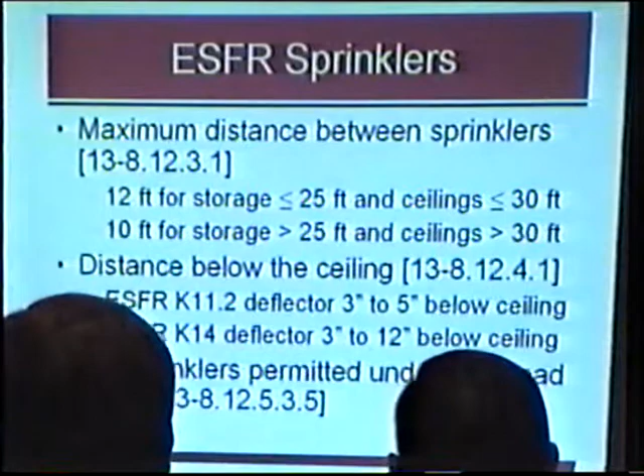Roll-up doors in a warehouse with ESFR sprinkler heads - you can now protect under those roll-up doors with just boring old normal sprinkler heads. You no longer have to put ESFR sprinkler heads under a roll-up door.

Concealed spaces - a little reworking on the definition of a concealed space. That's all this is, nothing substantial, but just defining limited combustible, meaning like paper on drywall. There's always an argument - well, you've got drywall on the inside of there. Heck, I can get one great fire going on drywall paper, so you have to sprinkler in there. Well, we've clarified that a little bit.

If you use composite wood joist construction, those I-beams made out of plywood - okay, they're just plywood. If you wanted to not call those a concealed space and not have a sprinkler in them, the drywall had to be attached directly to the bottom of that member. Now you're allowed to actually have some metal channels and separate that out.

Here's what I'm talking about: if I have these engineered plywood I-beam jobbies, before the drywall had to be attached directly to it. Now you can put some little channels and have some separation in there, but you have to have 3.5 inches of insulation on top of the tube. Now you can not call that a combustible concealed space and not have to put lots of sprinklers in it.

If you have pipe chases in multiple story buildings, finally - boy, I clobbered somebody once with this one - as long as it's fire stopped at each floor and the penetrations are sealed up and you've got non-combustible piping, that's no longer a concealed space.

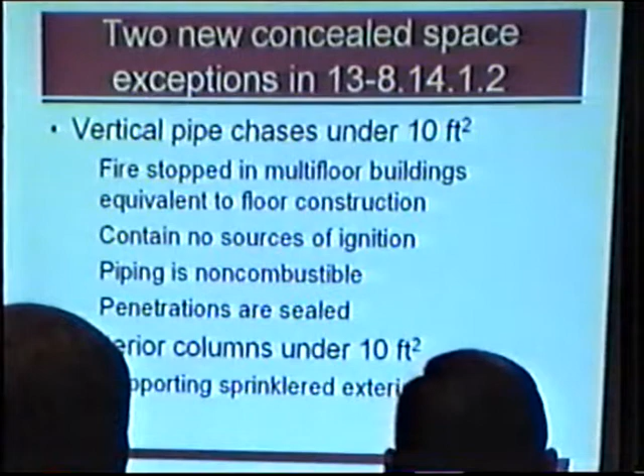That's not a concealed space, okay. This is one. I don't know how we're gonna work this one out.

If you have a concealed space that's horizontal and the depth is less than 36 inches, so a cock loft or an area between floors made out of 2x4 construction or something, if the slope is less than 2 and 12, and the upper surface is combustible, meaning plywood floor decking, so that the floor above it can be put on it, the sprinklers must be listed for such combustible concealed spaces. So the type of sprinkler has to be listed for this combustible concealed space.

Well, somebody, I already heard it over there. This is the first of several sections where the code is requiring something, but there is only a single product out there and it has patent protection for that design. And that product cannot protect all scenarios. Think about a product that cannot cover all horizontal combustible concealed spaces at 36 inches. There are certain designs a product cannot cover, yet it's required that you use a product listed for that.

So we now will have a case where you may have to fill that with insulation. I don't know of a different option. And so...

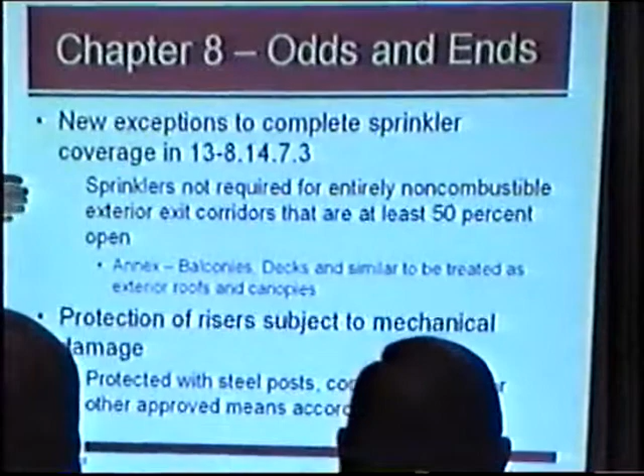If you have an exterior exit corridor balcony, this is the old Days Inn or Motel 6, where they've got the exterior balcony the whole way around that's non-combustible. You don't have to sprinkler outside.

This is the Chris Cahill amendment. Risers, if your riser is subjected to mechanical damage, or could be, if the riser is out in the warehouse, and that's where they drive the forklifts, you have to put something around it. Too many of them have been dinged.

Hanging and bracing, it's boring. The functions, the type of hangers, are now a function of the ceiling material. Well, that's only logical. So all the tables have been divided up. If you're putting it into wood, here's what you can do. If you're putting it into concrete, that's what you can do. And coach screws, you can only go up to 4-inch pipe.

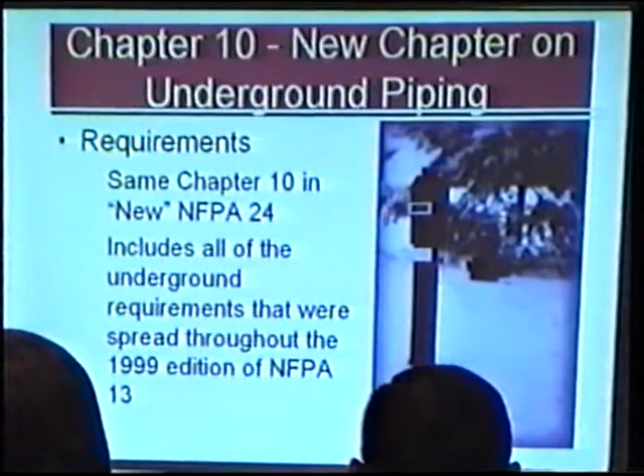That's the only changes. I mean, there's lots of earthquake stuff, but the stuff that was in NFPA 24, that was moved into NFPA 13 in the 99 edition, was scattered everywhere. So it's been put together in one chapter. But now, everyone has realized, well, we still want an NFPA 24, so NFPA 24 is coming back. So the material will be in both standards. So stay tuned for that one.

Okay, Chapter 11, Design Approaches. This is where the area density, the light hazard, all that stuff is located. And it tells you how to come up with how much water you need, and sends you to Chapter 12 if you have storage, or sends you to Chapter 13 if you have a special design, like a fur vault or a wood-constructed cooling tower on the roof of a building, something weird.

Chapter 11, the occupancy hazard design approach. I should say one thing, too, about the numbering. I've included numbering in all these sections so you can go find it again. The 13 means it's in 13. A few slides later, when I talk about 13R, it would say like 13R here. But the actual code section in the book is 11.2 when you go look for it. Okay, you won't see 13- in the book.

Area density curves, they were actually gone until an appeal to the Standards Council. The area density curves for everything, storage and the light hazard and ordinary hazard, were all gone, and it was replaced by a point on the curve in a table. In other words, everyone designs for the bottom of the curve anyway. Why are we wasting our time printing pages and pages of curves? Well, a few people had a problem with that, and so they ended up back in the standard. The standard basically was rewritten by the committee over a weekend. And so that was a pretty big issue.

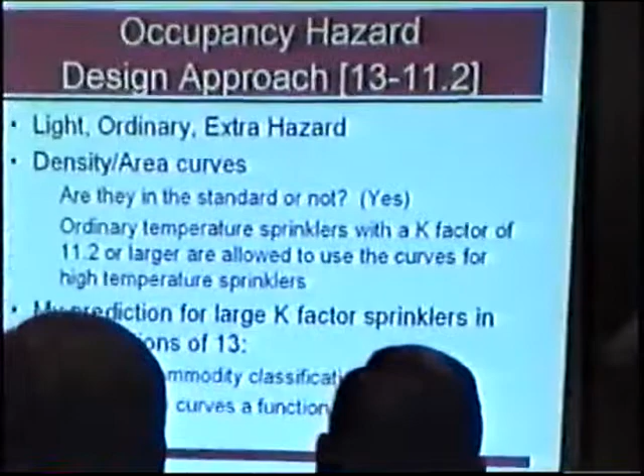If you have ordinary temperature sprinklers with a K factor of 11.2 or greater in storage, you can now take advantage of the curves for high temp sprinklers. Some people did some tests. My prediction for the next edition of the standard: you'll probably see for larger K factor sprinkler heads, the K17, K25 and all that, reduced commodity classification or reduced densities for those larger K factors. So you may have cardboard boxes, but you get to protect it as a class 2 commodity instead of a class 3 - that amount of water. Or the area density curves are going to be a function of K factor. They're finding out with testing that even more so than sprinkler temperature or commodity classification, sprinkler K factor is important.

Hose stream - this is a perfect example of a committee number. A couple of us brought up this hose stream thing where I have a light hazard school and there's one chemistry lab in there. So now I've got to include 250 gallons or 500 gallons for the hose stream if I have some extra hazard, even though it's a small area in my overall building. Well, you're now allowed to have up to 400 square feet, as long as each 400 square foot area is not touching - they're separated - you can just include the lower hose stream in that higher design. So if you have an ordinary hazard mechanical space in a light hazard building, and that mechanical space is 400 square feet or less, you can just use the 100 gallons per minute you would use for the light hazard. This number came from 3 or 4 of us sitting around one night writing the language up, and everyone went, what should we go with? And I said 400, and that's what ended up in there.

Because we said, well, 20 by 20 square foot, single head, extended cover, blah blah blah - so there was no great test data behind this that said 401 square feet is a problem, but 399 is okay.

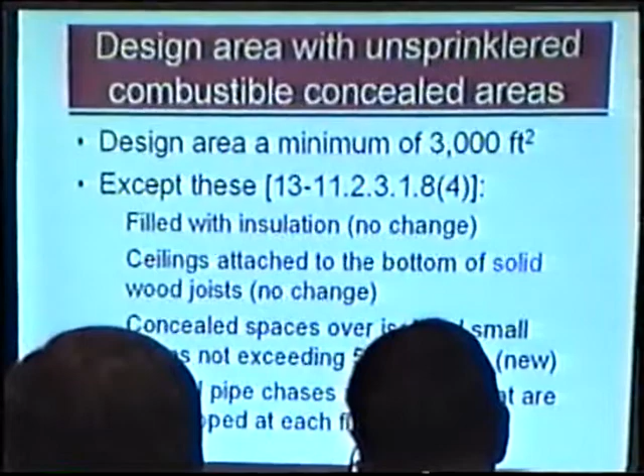Combustible concealed spaces - some people still don't get it, and it's still in the code. If you have a combustible concealed space that is not sprinklered, your minimum design area is 3,000 square feet. There's a few exceptions - a couple of them have not changed, 2 of them are new. If you have an area above an isolated room, less than 55 square feet in area, that can be a concealed space that has no sprinkler, and you still don't get dinged to 3,000 square feet. The vertical pipe chase one also - you're allowed to have that in buildings without getting the larger design area.

Design approaches, more in Chapter 11 - we already talked about that. Oh hey, if you do take advantage of the unprotected ceiling pockets, these big skylights or things like that, you cannot also take advantage of the reduction in design area for quick response sprinklers under ceilings that are less than 20 feet. So they give you something, they take away something. You have to decide on a given job what is more important: is it more important for me to be able to sprinkler around this weird step or ceiling pocket, or is it more important for me to keep my water low?

Some people were applying that increase of 30% for slope ceilings to storage, and it was made clear that that doesn't apply, because the storage protection does not apply to slopes greater than 2 in 12 either. You should not be using the storage requirements for buildings like this that are warehouses.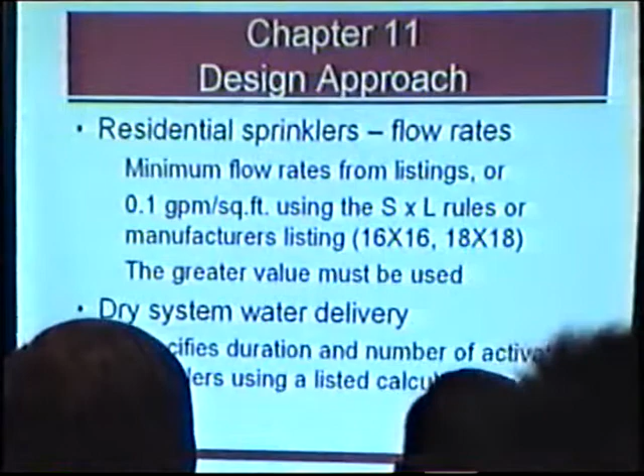Let's see, design approach - if you're designing residential sprinklers according to 0.1 minimum density, dry system water delivery, you can use a calculation method. That's in there now.

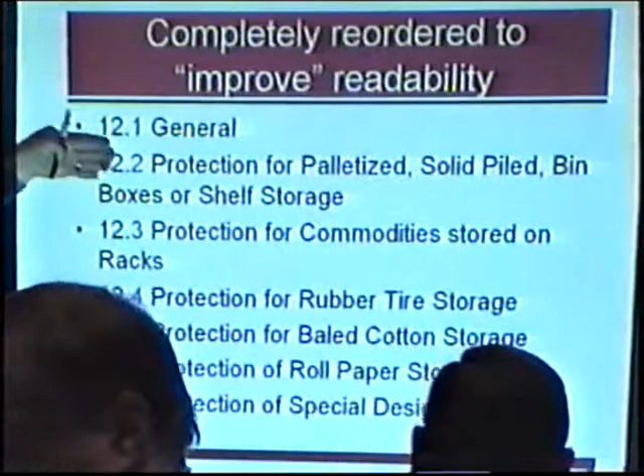Storage has been separated out into its own different chapter, so when you have idle pallets blocking the fire door, or when you have all types of racks or fun types of storage, you can go to your own chapter - and it's now improved, improved in its readability. The numbering of the different sections - palletized, racks, rubber tires, blah blah blah - within each of those sections, all of the numbering is the same within each of them. So within a given one of those blue sections, point 1 will be general, point 2 will be class 1 through 4. Within that, each of the head types you can have will be uniform.

So each of these sections in the storage chapter now is kind of cut and paste with the specifics that apply. So if you have rack storage with in-rack sprinklers, the in-rack sprinkler requirements are actually going to be in the section with rack storage. They're not going to be buried somewhere else. So it hopefully will be a little easier to use the standard, but it means a lot of cut and paste.

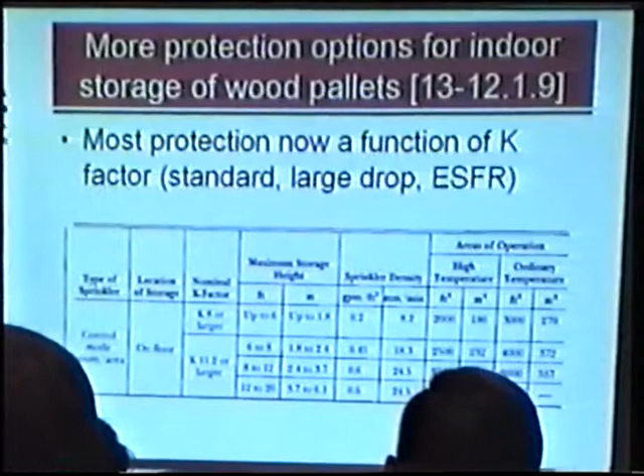There's lots of new data for wood pallets. As part of this plastic pallet stuff, the folks that sell plastic pallets wanted to show that stacks of wood pallets are bad and require more water, so they submitted data to say you need more water. So it's a function of K-factor. If you have a certain K-factor head, you can store 6 feet high. If you use a different K-factor head, maybe you can store 10 feet high. Here's an example of specific criteria for a specific application type head or an ESFR head. You can use a given density for wood pallets, so there's now guidance for wood pallets.

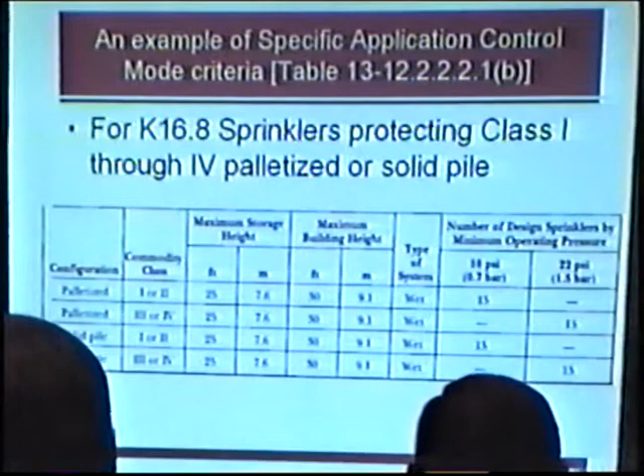Here's my example of specific application control mode sprinkler criteria, that new term. That means use a K16.8 sprinkler to protect class 1 through 4. Here's my height, and here's my number of sprinklers I designed, 15 at 10 PSI. So it's no longer telling you an area density design of 0.6 over 2,000 or something like that. It's telling me pressure and number of sprinkler heads. You use a sprinkler head with a larger K factor?

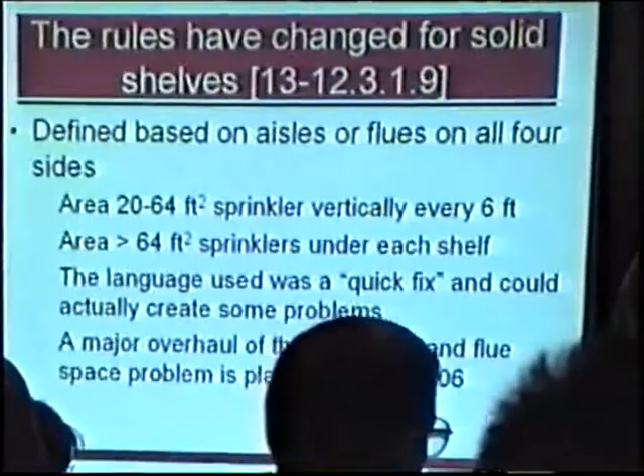That is going to be a big confusion. Some of the tables say K factor equal to or greater than 16.8. Some of them say 16.8 K factor sprinkler head. So it hopefully will be clear on some of them if you can use the larger one. We included that. If it doesn't, no, you're limited to that head, because that was the only head that had data submitted for the test.

Okay, here's the solid shelf stuff that has already started to ruin some people's days. There's a number of consulting firms already doing full-scale testing, getting ready for this one, because a few of the people that have very close shelves in their warehouses have gotten clobbered. If your area is between 20 and 64 square feet for a solid shelf, between a flue space or aisle, you sprinkler every 6 feet. If it's greater than 64 square feet, you sprinkler under every shelf. So if you have very close spaced shelves that are very large, you're going to have a ton of in-rack sprinklers. It was a quick fix.

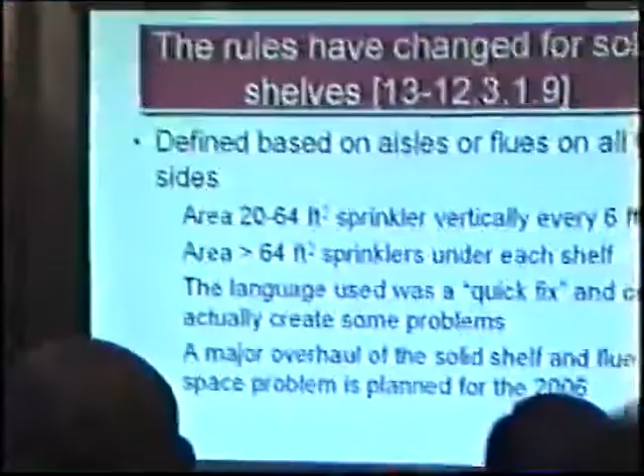I actually submitted a proposal to do a little something different with the flue spaces that was all tied into this, and it was felt, well, we can't deal with all this right now, we don't have enough test data, we'll save it to the 2006, but we'll take some of the FM global criteria, not all of it, and put it in the standard. And so for a few people, this is really going to mean a lot of in-rack sprinklers.

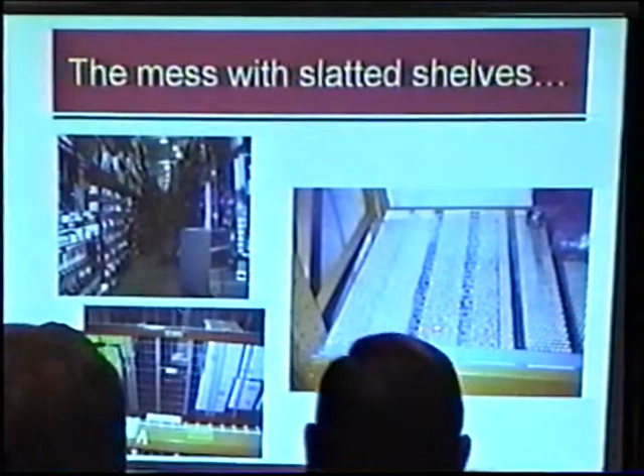Slatted shelves, these are a mess. We now have manufacturers coming in with their own special, well, I use this kind of perforated cover on my shelf. Well, I sell something different, and I use this kind of perforated cover on my shelf. We now have code sections written to specific manufacturers or specific big box stores. So if you have racks with slats and perforations on top, you can sprinkler it with a K whatever sprinkler to a certain density. The problem is, well, this time they doubled up the coverage right there, so now you don't have, and this is like 40% open average in the holes and that. I mean, it's an enforcement nightmare, and personally it's a mess. I wrote a comment to say get rid of all that, but nobody wanted to listen to me.

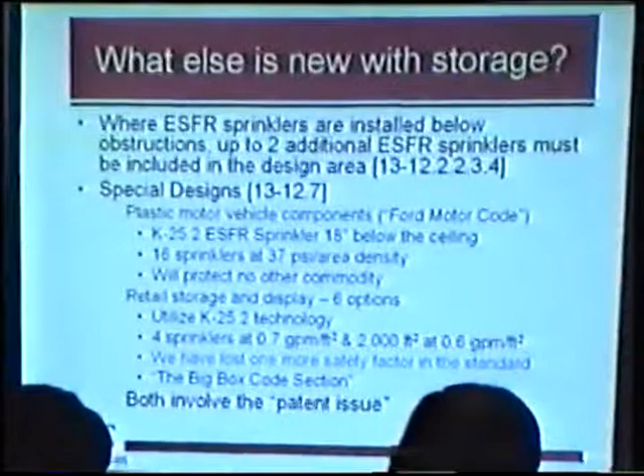If you have ESFR sprinkler heads, and you have to put some ESFR sprinkler heads under a big duct or an obstruction, you have to include 2 ESFR sprinkler heads in your design area to account for those. More water. There's some special designs now. This is that area of the code that's special design that's written for certain manufacturers or certain big box stores.

We had it in the '99. Remember we had all that slatted shelf stuff in there that certain home stores would use in their designs. Well, the Ford Motor Company was getting clobbered by fire officials all over the place when they'd hang these plastic vehicle components, the rubber bumpers or the foam dashboards or things like that. They hang them on big racks and have them in a warehouse.

Well, there's no design criteria. You could maybe say, well, that's exposed, expanded plastics, so I'll use that number. But they were really running into problems, so they sponsored some testing. Unfortunately, they sponsored the testing before the K25 sprinkler head was really out. They just went to a manufacturer and said, can I have this sprinkler head? It's big, it dumps a lot of water, and I want to go try it.

And so they tried it, and they did some weird testing. They had it 18 inches below that ceiling. They used some weird spacings, and they used 16 heads at 37 PSI for the design. And, well, it worked. So they started submitting this report to fire marshals.

Well, I don't like that report. It's not the right color. There's something on the cover of it. So they reject it. And so we want to get this in the code. So they got it in the code. Gordy went and even talked against it, and they didn't want to listen to what we had to say again.

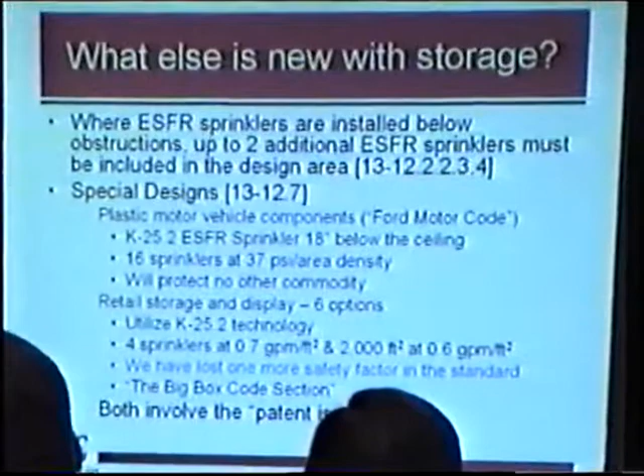And both of these involve the patent issue. There is a certain manufacturer of that head only, but because you could protect that rack storage with in-rack heads and a foam system, there's still another option in the code. You could protect it with a high expansion foam system, that rack storage. Therefore, there's still another option in the codes. Therefore, there's not a problem if we're the only company that sells that product.

Question. Yes? Which one of our brethren are out there creating these nice fat little loopholes that allow deviation from... Somebody at your table will whisper that in your ear. I'm dead serious. Well, this product is manufactured by Central Sprinkler.

The attic sprinkler - what has happened is, if you want to come up with a new head, and you run a bunch of tests, and they all fail, you'd normally bury those very deep so nobody knew about them. And then you'd change your head a little bit, it'd pass, so that's what you'd send out. Well, now people are going, well, damn, I spent all that money, I got to use that stuff. So they go, well, let's use that stuff to change the code so that our product is the only one that really works. So then they submit it, and the committees go, well, yeah, you're right. The way we used to put sprinklers in attics didn't work very well. Here's some test data that shows it didn't. So we changed the code.

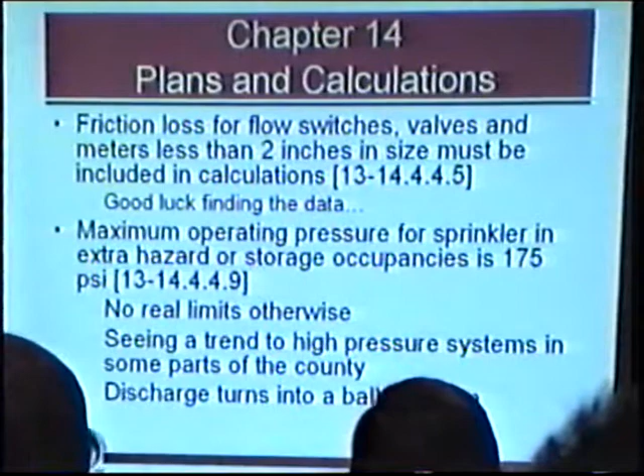175 PSI maximum on storage and extra hazard. What we had was some people that were doing the following. In parts of the country, maybe where labor expenses are very, very high, they would say, well, I'm buying a fire pump. Well, why don't I buy a 300 PSI fire pump, or a much higher PSI fire pump? The fittings are only a couple bucks more, and now I hang 1-inch pipe throughout the whole warehouse because I'm running it at 300 PSI and I have a ton of pressure to lose. It was cheaper for them to buy a 300 PSI pump.

Well, all you get is a ball of steam when that head opens up. And so that has been, we put a stop to that.

I test my valves. If you design aircraft carriers or stuff, there's a few changes. No changes to anything else.

13R. 13R and 13D, not much change, other than the density issue.

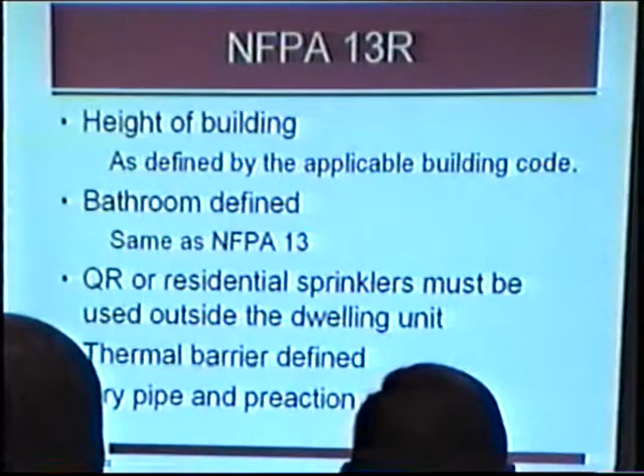Bathroom's been defined. Thermal barrier defined if you have the area behind a tub. A few people were getting clobbered because 2 tubs would go back to back in adjacent apartments. There would not be a thermal barrier between them, and people were having to design sprinklers in both and all types of things.

Looking at more dry pipe and pre-action systems in residential, there's a big issue. It wasn't resolved, but probably in the next edition there'll be some guidance on dry pipe systems for residential occupancies.

Minimum density of 0.05, we've all heard about that. You can use a regular sprinkler in a mechanical room. Finally, guidance that says, no, you don't have to include 100 gallons per minute in your 13R calculations. Unless it's outside the area.

Garages, yeah, this was always a great one. If you have a garage that only opens up to a single dwelling unit, it's just a room, nothing big, still in 13R. The door is no longer an obstruction. There's specific language that says you don't have to put another sidewall head under the garage door.

If it has multiple unit access or is separate from the building, in other words, the building's here and the parking ramp's here, and they're separated, now that's outside 13R, you do all that according to 13.

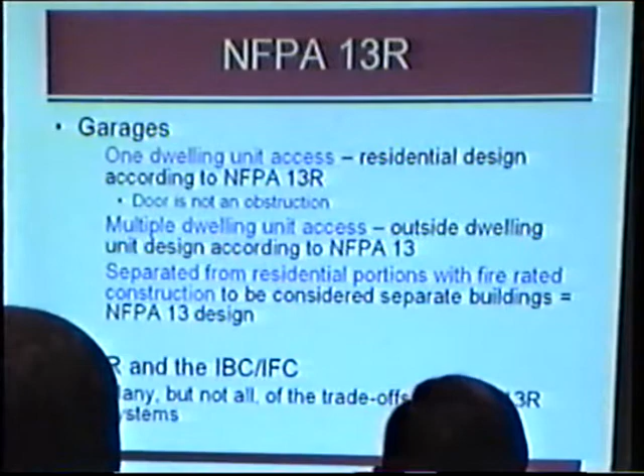You're going to find that many of the trade-offs, not all, but many, in the building code, the fire code for 13 systems now also apply to 13R systems. So this is another reason for people to install sprinklers, because now the corridor widths can be narrower, the travel distances can be longer, all for 13R systems. You get out from a bunch of other things too.

Bathrooms, again, standing with long tradition. Every edition in 13R we changed what you have to do for bathrooms. We've done that again.

In the past, it doesn't matter what was going on in a combustible concealed space, we didn't sprinkler it in 13R. If you have fuel-fired equipment in a combustible concealed space, you have to sprinkler it now. Too many fires happening in there.

13D, more on the multi-purpose system, mostly just definitions. This was an area that had many appeals, both on the floor in Minneapolis when the standard was voted on, and to the Standards Council. If you have a softener or a filter, you have to get some sort of bypass around that.

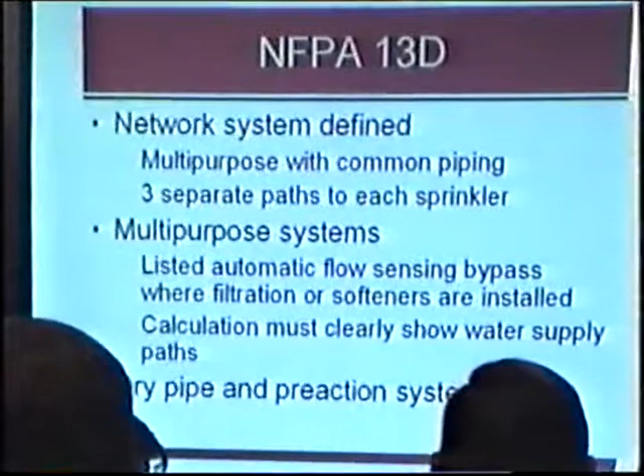Minimum density, same things as with 13R. You don't have to have spare sprinklers with 13D systems. Generally, those are probably not getting back in service that night. They don't have a maintenance person responding out.

Protection guidance now in the annex chapter, right? Annex. You don't have to, there's guidance. In many parts of the country that have mandatory 1 and 2 family residential sprinkler installations, the code officials also require a sprinkler in the garage, or some sprinklers in the garage. Now there's guidance for that. One sidewall head you get in the garage, how to do that, and how that allows you to do that. Question - how do you get 3 separate directions supplied to a sprinkler?

Multi-port fitting, multi-port that has 4 things hanging off of it. There's been some change a little bit in how you pipe those with your tubing, in that if you have an open port, you're supposed to go back to another sprinkler with an open port, or go find a home run back to the water supply.

Let's see, limited area dwellings, manufactured housing, that one went away. Two people had a problem with that, but not a whole lot.